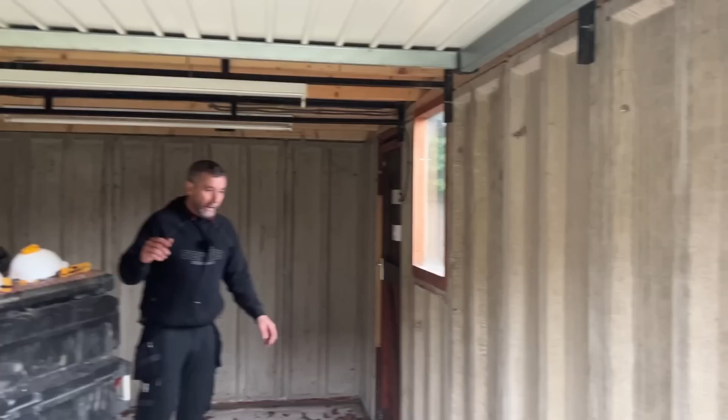So basically, it's a 5x3 garage, concrete sectional garage, and we're going to turn this footprint into a 5x3 garden room. It'll have bifold doors on the front elevation. On this side elevation, there will be a window, and an integrated store with a new door into it.

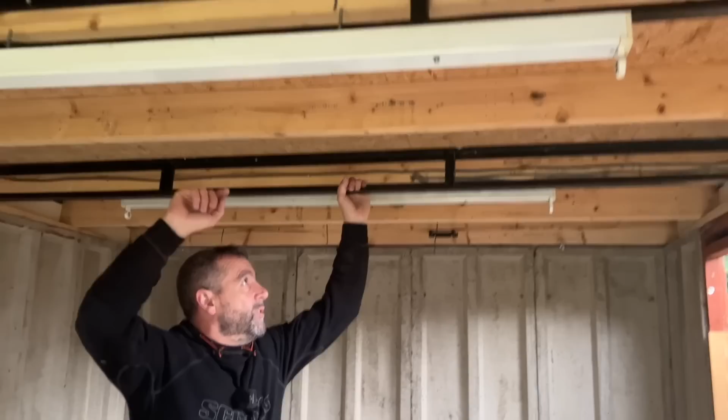So first things first, when we arrive at a job, we've obviously got to strip this, so that's in with the cost of the build. It's had a fiberglass roof put on it at some point, so that's a bit of a new one, we'll strip that. I'm thinking we'll just run the circular saw through it and cut it up into sections. The concrete sectional garage itself is relatively heavy.

The way we will strip that is the way it was built. We'll drop the doors off, take a panel at a time and work our way back towards the back of the building. Then these corner pieces at the back will be held up, we'll take a corner off and work that way, and we'll be just left with one corner. In my mind, that's how they built it.

We've stripped a few of these with me and John. Have you stripped one before with us, Jen? Yeah, you have. They are heavy.

We're a man down as well, so what we may do is lay the panels down, cut them in half, ready for the skip. It's a shame actually, because it's a good, decent garage. It's a shame that it's not being reused somewhere else.

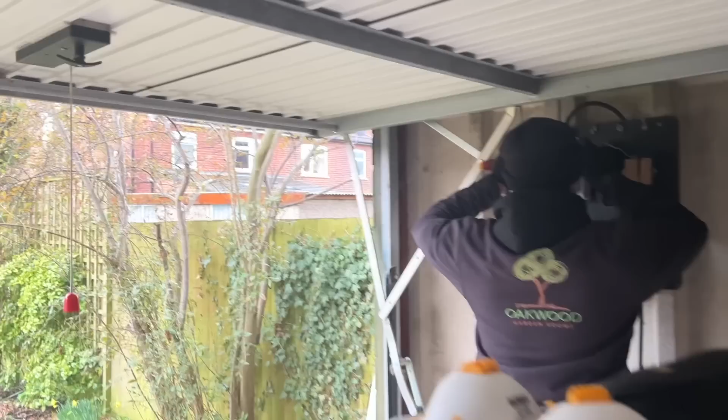But anyway, what John's going to do now, the customer's already turned the electricity off in the house, he's already proved that to be dead. So what he's going to do now is take away the lights out of this circuit, take that board off, and we're going to use that board for our power. He'll put a bag over it, to stop the rain getting in there at night time.

This garage has already got a concrete base. Now, we can't guarantee the strength of the base, so we very rarely build off there. We've built twice off it.

What I'm going to do is try and answer as many questions that have been asked. Jen's wrote loads of questions down over the weekend in a book for me. We'll get the book in a minute and run through some of the base questions.

But the reason why we're not going to use this concrete base is we don't know how thick it is. Our building this size will probably weigh about 4 to 5 tonne, so we don't want to risk building off there and then it cracking in the future.

So what we will do, we'll pin out our lines. This base, did you say it's just over 5 and 3? 5.1 long and 3 wide? Yeah. So what we'll probably do is punch off the corners, dig down, and put our pile system in. But I'm going to talk about it in great detail throughout the build.

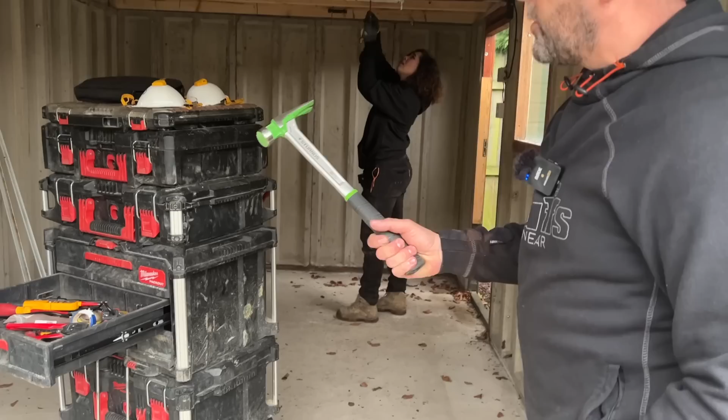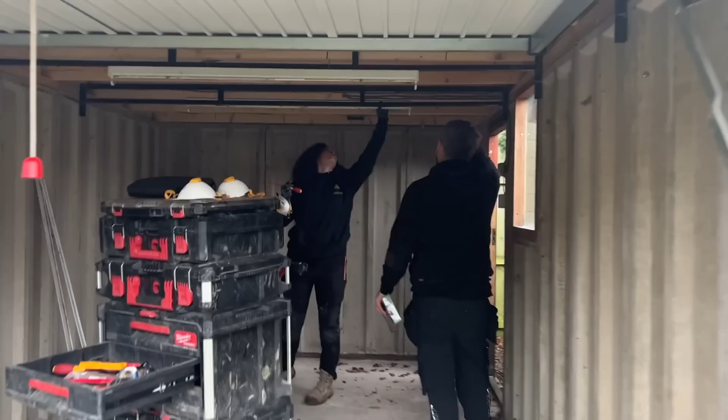So what Jen's doing first, she's going to strip the lights. John's already killed the electricity, obviously, so Jen's going to strip the lights. And then what I'll probably do is get up on the roof and run the circular saw through it, cut it into manageable sections, and then we'll go from there.

But like I said, I'm going to explain absolutely everything about this build. Timber delivery, we've got - I actually forgot to order the timber, so it's going to be here today, but a little later than normal. And we're going to have to organise a skip as well to get rid of this concrete sectional garage.

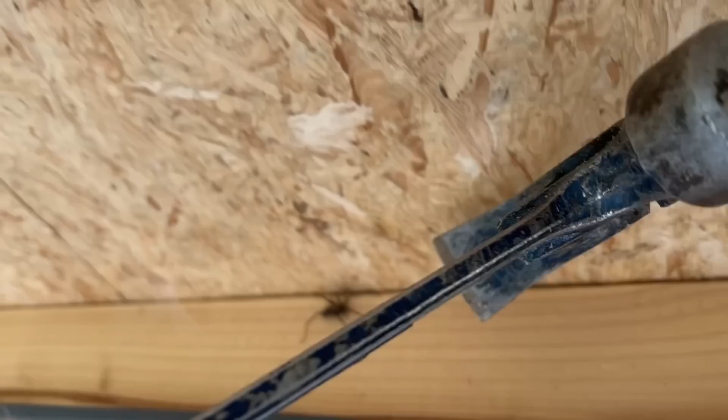Right, the timber's here now. I did actually forget to order the timber on Saturday. Rang them up this Monday morning rather, and it's here 2 hours later, which is brilliant.

3 pack of saws, we'll talk about saws as well. We've got some nails there too - some 90mm smooth, and some 63mm ring shanks. The Viper brand, simply because that's what our supplier uses. We get all our stuff from Shire Timber.

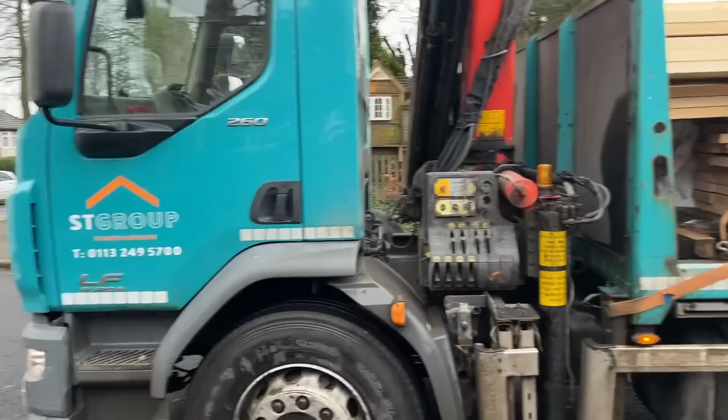This is Arthur. Arthur is a regular driver, and he's an absolutely brilliant bloke as well. Right, if Jen comes round here, she might be able to see what we've got. What's ours, Arthur, that far one? Yeah. So like I say, I only ordered it this morning and here it is already.

I'm going to talk about this extensively, but I'll go through it quickly now. There's your 4x3, that's your 4x2. There's some CLS, some different lengths of CLS, and there's your 5x2 as well, and there's your slate battens for cladding. So you've got base material there for cladding, that's for roof, and that's partly for walls.

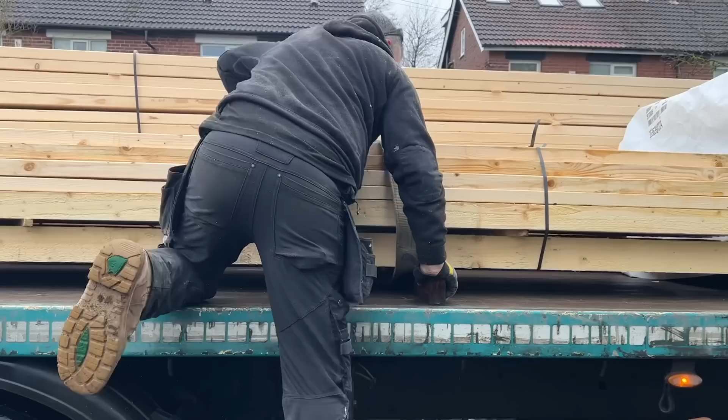The rest of the wall pack will be in under the sheet there as well, with the OSB, the Jaeger Protect, and the flooring as well. So as I say, I am extensively going to talk about this as we go through it. Arthur, are you just going to drop it on the verge there?

Yeah, whenever, yeah. Right, so what he'll do now, I have this off.

There's different ways of building a garden room. You can build it like this, out of timber, from scratch, or there's now metal framing, which is on the market as well. There's insulated panels, and there's also SIPS panels, whichever you choose. But if you follow this tutorial all the way through, you will be able to build one of these without a shadow of a doubt.

And if you buy a build pack, the build pack gives you a full list of materials. So all this will be in the build pack for the size you buy. You don't have to do any working out, anything like that. You just ring up your timber merchants, tell them what you want, get your quote, ring up another one, get your quote from there, ring up another one, get 3 quotes, and obviously go with your best quote. But again, we are going to talk about costings of timbers and stuff like that as well.

So what you'll do, under there is the OSB3. Now that's the roofing board. We want to keep that above all dry. This we're not bothered about - it rains and it's kept outside in the yard anyway.

That was one of the questions as well - does it matter if the timber gets wet? To a certain extent, no. We will sheet ours up to keep it relatively dry, but it will dry out naturally as the build goes on. What you do want to keep dry though is your OSB3 roofing boards.

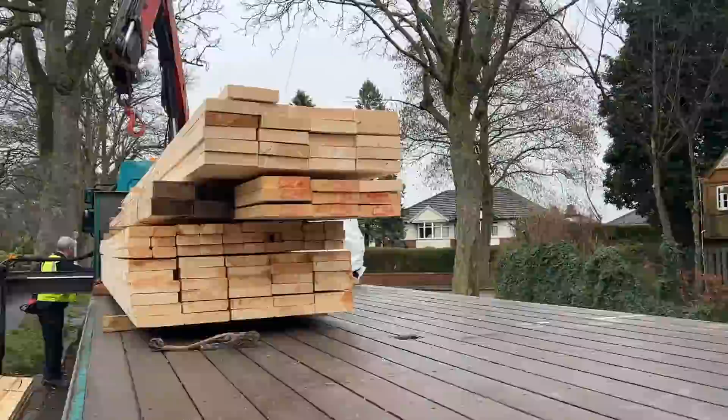Oh, Arthur! Arthur! It's on the grass, isn't it? It's sunk in. Do you want to pull it out with that? As long as you don't slide it to the road. Is yours trapped? No, but mine's back out. Yeah, get yours out.

What's happened is it's trapped the strap on the earth, so he's just going to try and pull that out now. Just watch yourself.

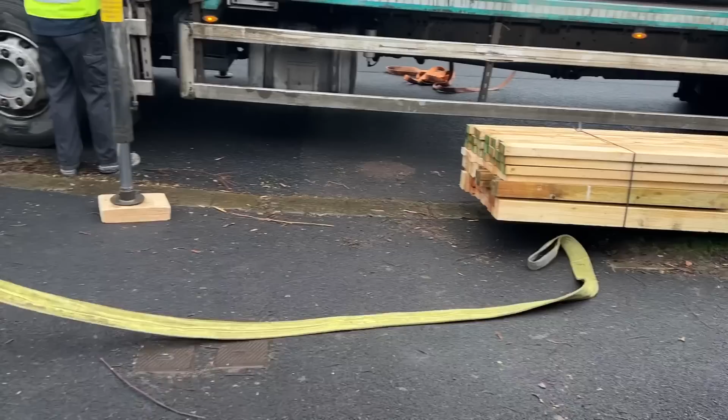Lovely, so successfully got that off without any skills indeed. We left the path nice and clear, and this customer's shared drive, so they can still both get the cars out, only just, but they can still get them out. Right, so that's it, Arthur will go on his way now and get rid of that timber. We will have breakfast, and we will probably get the timber round before we continue with demolishing the garage.

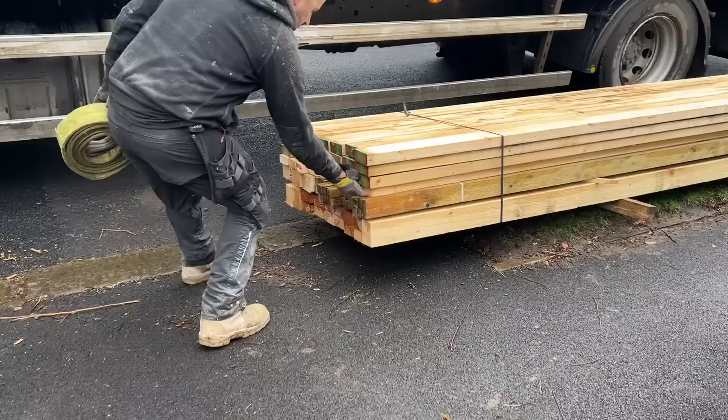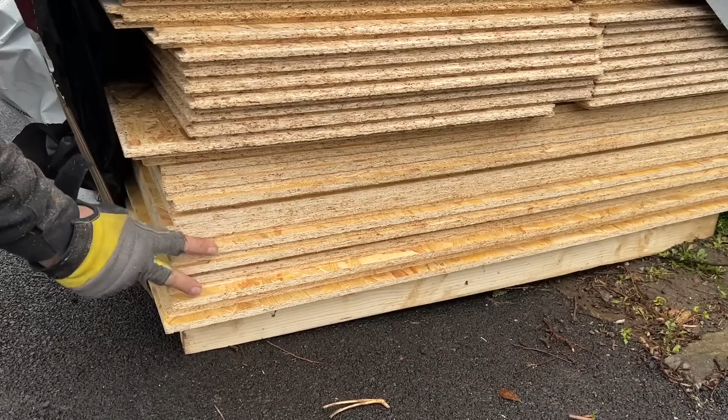I think I'll talk to you about timber then, when we get it round. We will protect ours, though it doesn't matter if it's not protected I suppose, because it's all outside. Slate battens kept outside, 5x2s kept outside on the racks. The thing which generally isn't is the CLS, which is under there. That's our wall framing stuff. We should have, David, can I give you that please? We should have some under here as well. So that's for our walls, that's for our floor, that's for our roof, and that's for cladding the walls and the internal storeroom as well. But like I say, I'll talk extensively about that after breakfast probably.

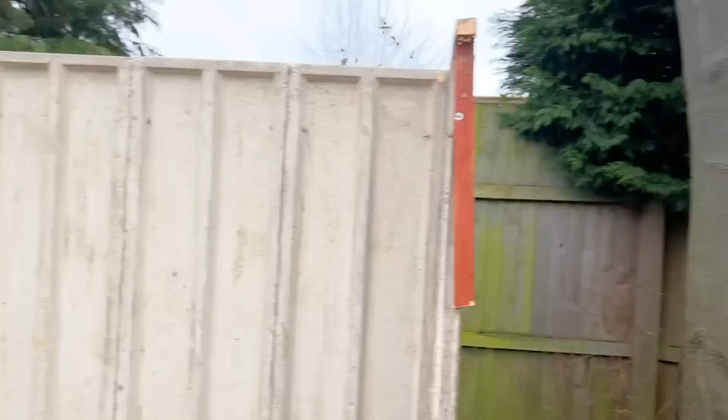Right, so what we're doing, we're stripping this concrete garage. Obviously it's really heavy, we've gone for a reciprocating saw. The reciprocating saw was left in the container, but we've been back, got that, which is a lot better for cutting that fiberglass roof and up into manageable panels. But these concrete things, I'm estimating they weigh about 70 kilos each, maybe even a bit more. So what we've done, because we've got quite a bit of a drive to get to front and skip, we'll cut them in half, with the Stihl saw.

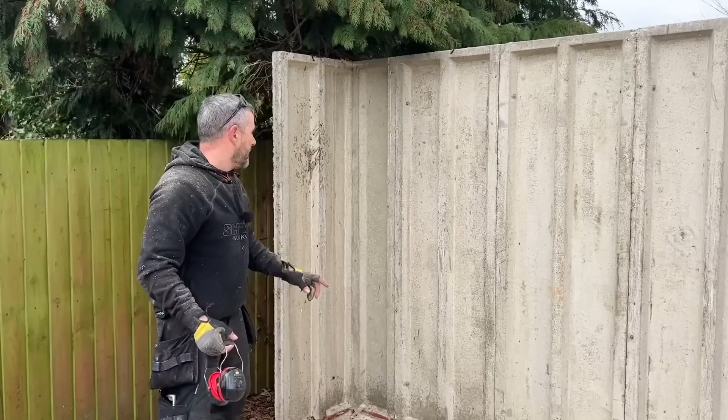But this is how you need to take this down, I'd imagine this is how they built it. They'll get a corner up first and then start from there, but it's by far the safest way, a panel at a time, even though there's a wobble on that, that's still structurally okay. So what we'll do, we'll take off this corner and then work that way and just have the two corner bits there together, which will obviously hold themselves.

But like I say, it's got to be more than 70 kilos anyway, John, what do you reckon? Maybe 100 kilos, not far off that. Maybe 100 kilos a panel, but what we'll do, we'll get them in the skip tomorrow.

But you can see the base now. The base, we're going to talk about it obviously extensively, I'm going to keep saying the word extensively. But what we're thinking now, we might have a chat with the customer, and if he's all right with it, give him a little bit bigger than what he's asked for, just to save us breaking through this concrete pad. So what we might do then is just dig down at the side and put our rods at the side and around, and then in the middle there we'll probably chem fix them if the concrete's sufficiently thick. If it isn't, we'll punch a hole and dig down there for the rods. But we will talk about everything, but that's what we're thinking at this moment in time, aren't we, John?

Yeah, we're thinking make it bigger just to save us more work, even though it will cost more in the long run, but that's why we've got no money in it. Okay, right, so we're going to carry on stripping this.

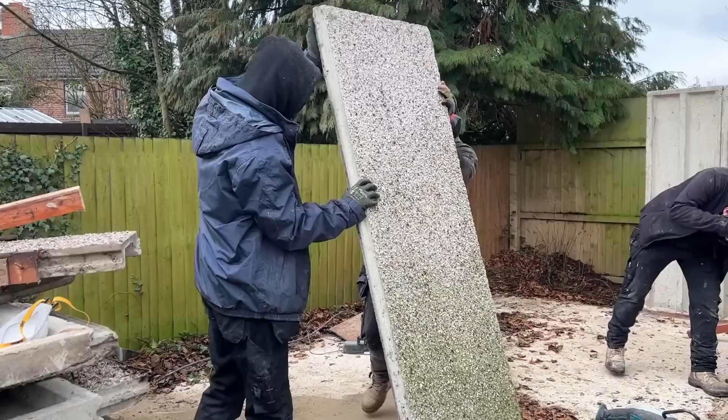Right, the garage is completely dropped now. Skip's coming tomorrow, so we'll get rid of that. Couldn't get a skip because I couldn't remember when I came to price the job whether or not we could have one on the drive. A skip needs a permit, so 24 hours to get a permit to park it on the street, so that's what's happening there. There's the roof, we'll probably cut that up into smaller sections for the skip tomorrow.

And there's the concrete, which we'll bring a sack barrow thing tomorrow to wheel that round because it's still quite heavy. The skip is nearly £300 now, so you need to get as much as you can in that skip.

Anybody who's filled a skip before will know what a greedy board is. We'll possibly make some greedy boards out of these.

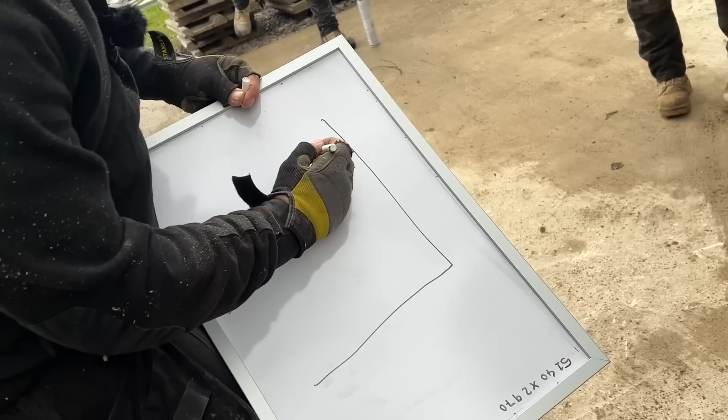So what we're going to do is, if that's the customer's fence there, and that is his concrete pad, so it's 5,140 that way, 2,970 that way.

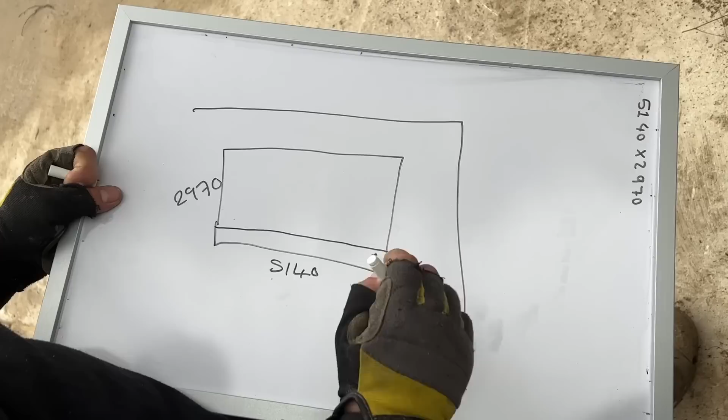So what we're going to do, because we need to save ourselves a bit of work, is cut off that section of concrete there, get rid of that. We're also going to cut off that section of concrete there, get rid of that.

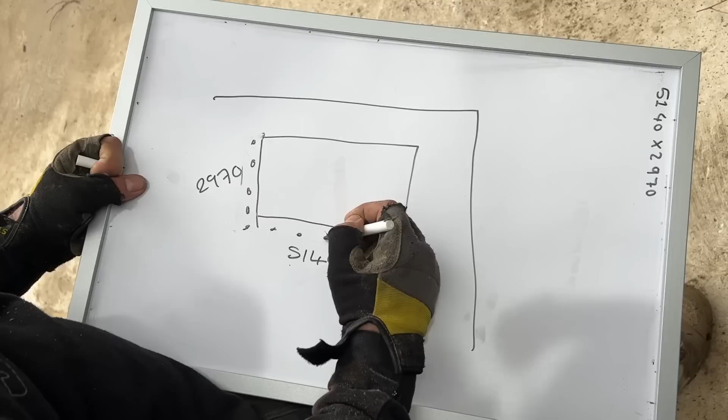Then we will put our rod system like that, which means the customer will not lose any of his garden to what he had originally, and the rod system will go down the side of the concrete pad, like that, and in the middle we're going to drill some trial holes.

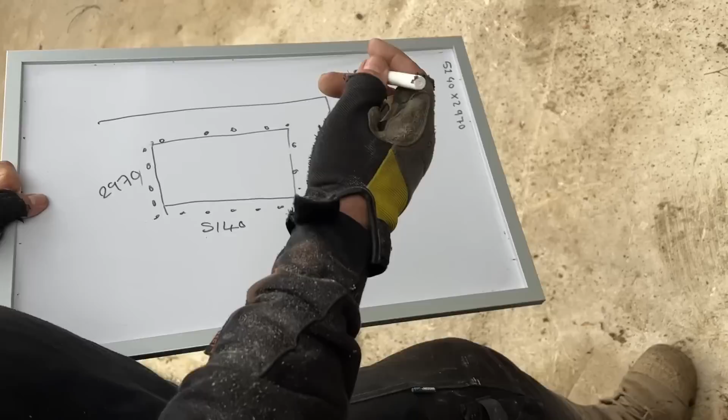What we'll do basically is get a masonry bit on the hammer drill and drill it through the concrete. When we feel it goes through, we'll measure how far the drill bit's gone in, and if it's 4 inches, we'll drill some 25mm holes there, and resin them with chem fix.

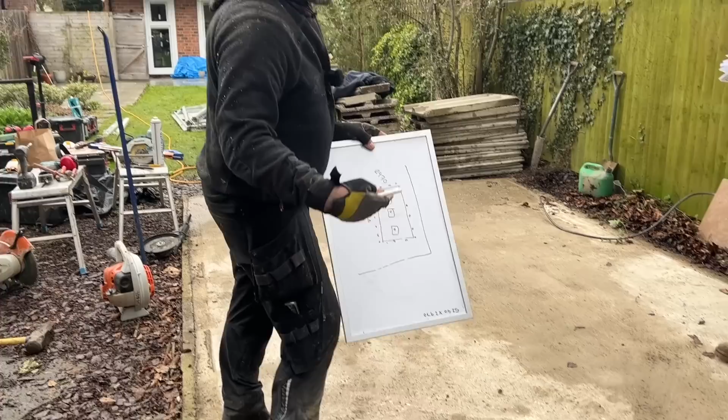It's like a chemical resin, but I'll show you that if we go down that road, and we'll put some rods in there with the chem res. But if not, we will cut square holes out if it's only like 2 inches thick, punch some holes and put some supports in. And don't forget, the middle there is basically to take the bounce out of the floor.

What we're going to do now, I've asked for questions because I want to give you as much information as possible, and without the questions I can't give you the answers. So Jen spent all weekend, haven't you, Jen? Literally all weekend writing down questions. So she's going to fire a few questions across, and I'm going to try and answer them the best I can.

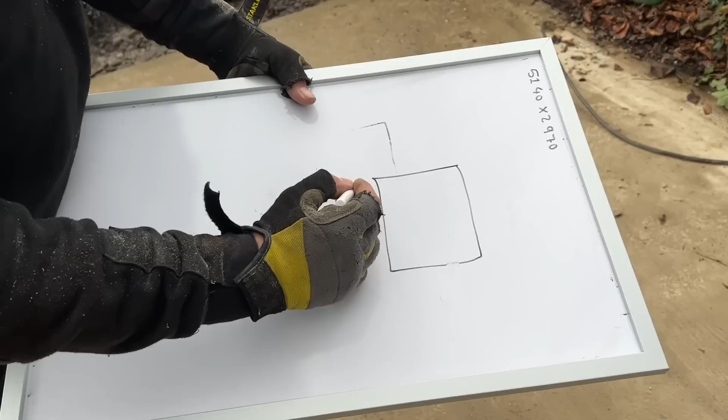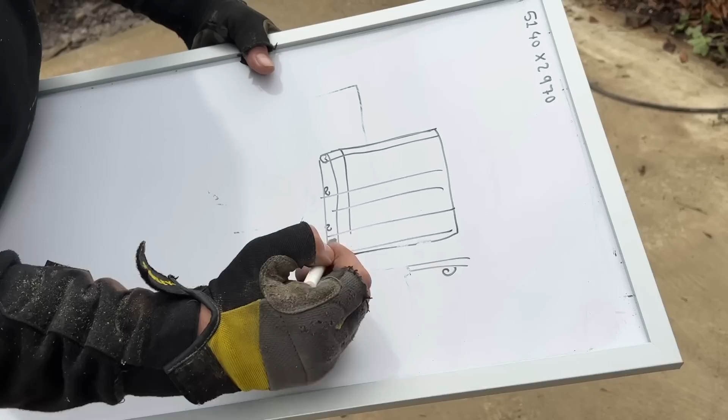So what we did, we put a series of rods like that and extended the garden room. Here the timber was sat onto the concrete, but we had our normal frame around there, so that was on the concrete. We put a DPC under that and infilled with insulation, and then we extended it and made it bigger. So that's what we did.

But the customer told us the concrete was 8 inches. We trialled it, it was 8 inches, and it had rebarring as well, so we were more than happy to build off that. And we did another one in Huddersfield - I believe the lady's on the group as well - and we chem res'd that, so we drilled it.

It was like 8-9 inches thick somewhere, wasn't it, John? And we drilled it, put chemical resin in, and put the rods in there. So yeah, we've done that, but we've adapted it as well.

Next one, there's a question from George Webstale. He's building on a concrete base and he's wondering how he will insulate the floor without causing a height issue.

You can't really avoid it. This is one of the reasons we use the rod system. Let's say this pad wasn't here and you wanted to build on a concrete pad - you'd have to dig out this area first, dump the muck elsewhere in your garden or into a skip. You'd be digging down 8 inches, which is a lot of muck. Then you'd want 4 inches of hardcore, whacking it all down, then create a shutter to get your level pad, put visqueen in to stop damp coming up through the concrete, and then pour the concrete - and all that's time and money.

Where am I going with that one? What was the question? I can't remember. Hold on... he's building on a concrete base, he's wondering how he will insulate the floor without causing a height issue.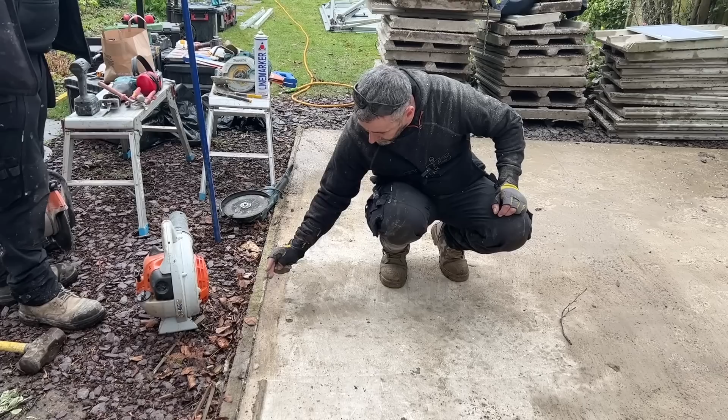So basically what will happen is you'll put this pad in like that - can you see this ground's pretty level? You'll put the pad in, but then you have to insulate the top of the floor. You'd build your walls off there, put insulation up the side of the walls as well, then put 100mm insulation here, or 70 at a push, and board over the top of that. So you've lost nearly 4 inches in height - even with a level base, you're still losing that height. You have to insulate the concrete, otherwise your building won't be thermally efficient and it'll be freezing.

I've got another question here, from Zig, pretty similar. He's getting a concrete base added to the garden in a couple of weeks. He's seen that we cut holes in the base and re-concrete the rods in - should he do the same, or should he screw directly into the concrete to hold the floor frame? As long as he's got a sufficiently strong pad, 4 inches plus, with concrete and rebarring, that would be sufficient for any building.

What he needs to do then is put a damp course in and fix his timber wall plates straight to the concrete, but he'll need a damp course under there as well as on the concrete itself. As per the last question, he will have to insulate the inside of that as well.

Another question: is it best to leave insulation off the concrete using slate battens, and what's the lifetime of insulation since the bottom's exposed? If he's putting the insulation straight onto the concrete, that's fine, as long as there's a damp course under the concrete. He can put the insulation straight onto the concrete as long as it's level - he doesn't have to take it off, and that insulation will last a lot of years.

It's not remotely going to rot. The only thing that breaks down insulation is UV rays, and since it's trapped under the concrete and under the floor, it's never going to come into contact with UV rays. I'm going to answer one more while you're doing that.

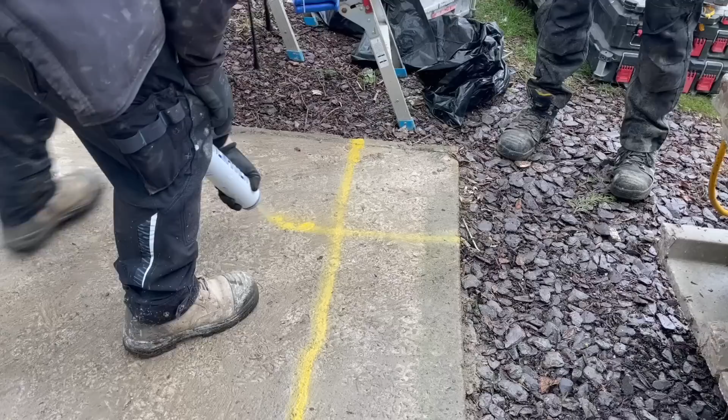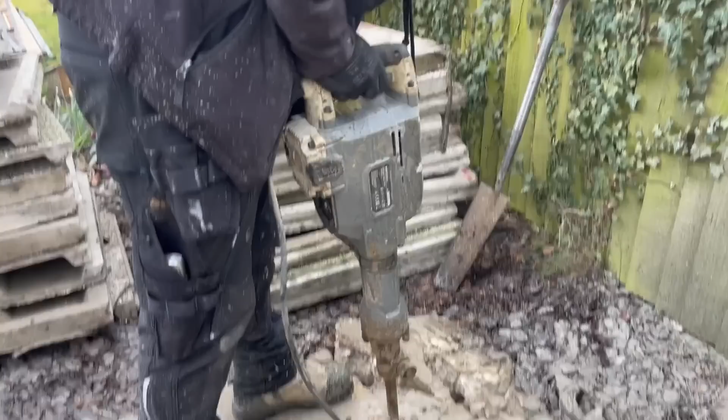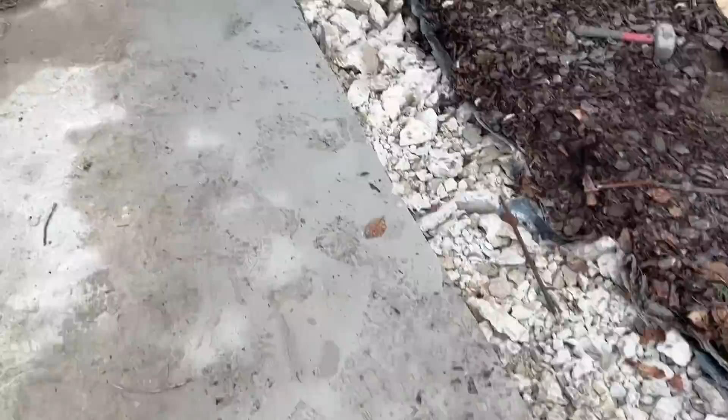Right, you can see what we've done then. John exposed concrete over here, and he showed me it was 4 inches thick. Turns out it was a lot thicker - in some places, let's have a look at this, we've got 6 inches thick. We still wouldn't have used it, to be fair. There's no rebar in it, so I'd be worried about cracking in the future and maybe a wall subsiding slightly. So what we've done, we've took the front off, we've took the side off, so that we can push it all that way and that way, which is what we'll do.

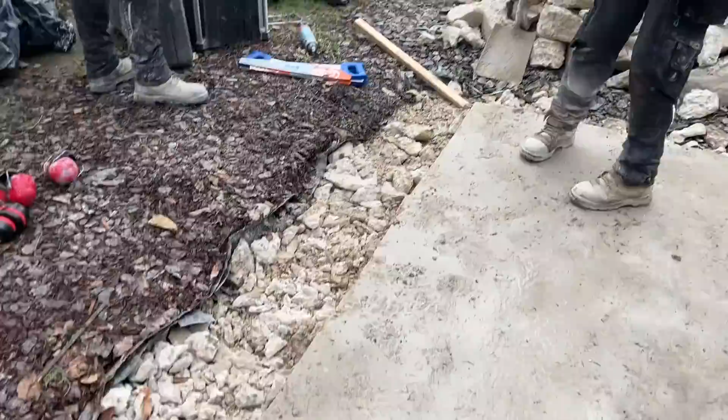So tomorrow we're going to dig some holes down there, and we're going to talk about the holes and the rods tomorrow. We'll put a row down there and a row down there, a row at the back end, and we're definitely going to chemically fix the rods. So what we'll do, we'll drill 25mm holes, put the rod in with chem fix, and that will get a grip of that, and that works really well.

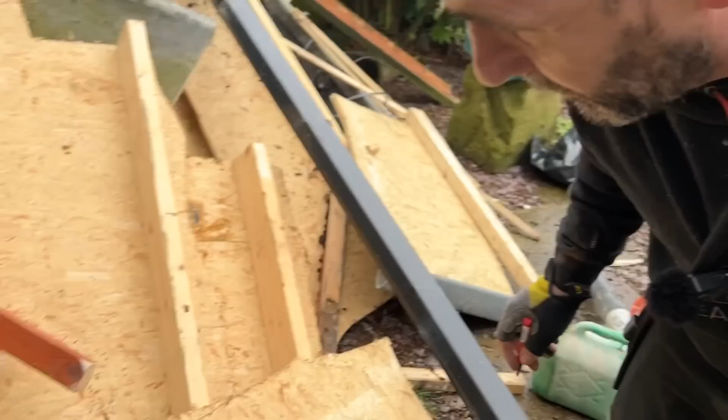Next one, Michael Bonehill: his back garden drops by about 2.5 feet from the back wall of the house down to the fence. At the bottom of the garden, where does he take his measurements from to allow him to build up? It's open to interpretation, but this is the rule: if that's the lay of your land, to exaggerate it, and that is your building there, the 2.5 is taken from the highest point of land adjacent to the building. So that distance needs to be 2.5. Adjacent means closest to the building, so that point of land would be closest. Even if that was 4 metres, your neighbours ain't going to be happy, but that's where your 2.5 is taken from, the highest point of land adjacent to the building. Even if that's the front of your building and that's the slope on your roof, imagine a line going across at 2.5, that's your highest point of building adjacent to the highest point of your land, if that makes sense.

RC Escape asks: when putting in the rods, how do they not sink, and do you worry when it's built on a slope? We'll talk about that tomorrow, but basically there's a steel plate washer that sits within the concrete so the rod cannot punch through. We dig down to solid ground and the concrete sits in the solid ground, so it's pushing down on solid ground, and the rod can't push through because it's got a square plate washer.

I feel a bit like Martin Lewis. Next question, well done, I think I've done...

Is that it for the base? I think that is it for the base, that's it for the base. Right, we're going to go talk about timber now.

Oh, there's one you wanted John to answer. Go on John: Pazza99 asks, be good to have more detail on the different challenges faced when digging out the holes for footings, like tree roots, discarded old bricks, and what's your opinion on ground screws?

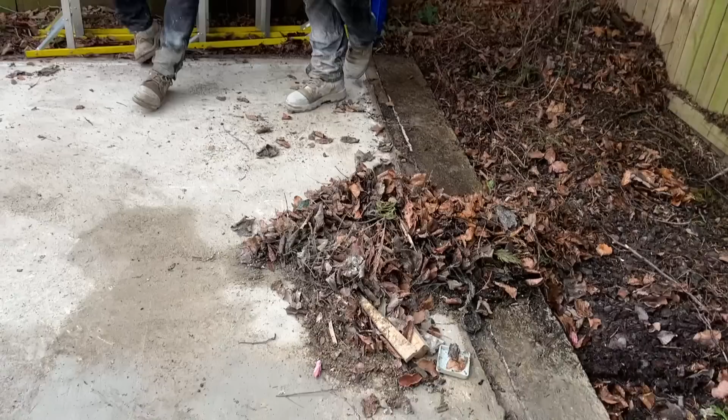Why do you always use rods, even on existing solid concrete bases? Well, I think we've answered that - we cannot guarantee the strength of this base, although it is 6-8 inches thick. I've commercially built these and I have to give a warranty on them, so we have to guarantee it. Because we didn't put it in, we won't build off it, unless the customer tells us that we can, and they'll take the fall for it, and we're happy it's 8 inches plus.

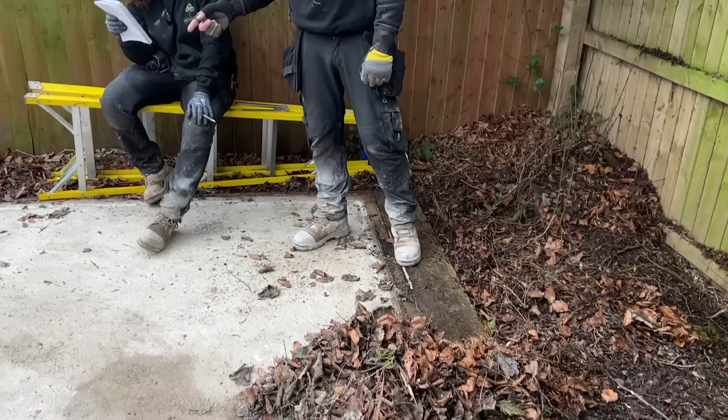You're not saying it didn't suffice? No, I'm definitely saying it didn't suffice. If this was my garden, I would have drilled some holes in this and gone, you know what, I'll build off this. The only downside is it's been laid properly - there's a DPC under it, but it slopes, so you'd have to counteract that when you built your walls because you've got a sloping floor.

Can you explain how different methods - rods, screws, concrete blocks - can be used in various types of location? Yeah, I think I've just explained that. So there is an option.

Let's say your ground's like that - you could have rods there if you wanted, a breeze block wall, or breeze block piers. You could dig a little hole and breeze block some piers up, but you'd have to make sure they're all dead laser level, then just support your framework on that. Would it make a difference about the type of ground - sandy, rocky?

I know a lot of people worry about clay, but we prefer to get clay, don't we John? Yeah, it ain't going nowhere. If you're digging an extension, they want you down a metre till you hit good clay. The clay's solid - once that concrete's in there, it ain't pushing down anywhere. It's absolutely brilliant, clay's good.

We've had sandy ground, haven't we? Yeah, we've had rocky ground where it's been just backfill - loads of stones, loads of crap, loads of house bricks - and we've dug down to a good decent depth. Then what we've done, we've gone wide as well, so we've got almost an elephant foot shape of concrete, belled out at the bottom. That gives us a big solid base. Even though the ground is pretty crap, you've got a big section of concrete weighing it down. That's what we've done on rough ground, and when it all ties in together - you might have one that's a bit dodgy, bit crap ground, but you'll have a couple that are really good, and you've got loads of concrete in them. Bigger holes, wider holes, that's the answer to that one.

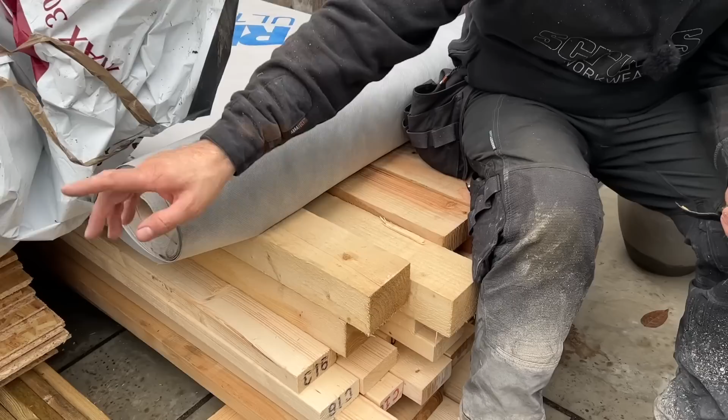Let's say you bought a build pack for a 4x2 free. Granted, there's a little bit more in this because we've got an internal wall, but this is what you're going to get - a full list of all these materials here. Yeah, that will be on the list. And if you build the build pack according to the instructions and stick to the size that you've gone to, then you will have very little wastage. So the build pack itself will save you money and time.

A lot of people have asked the question, where do we get this 4x2? We're going to talk about every type of timber as we go through it. But the 4x2, apparently it's a struggle to get hold of in Scotland.

So I asked a question on the group. If you're not on Facebook and you can't stand it, which a lot of older people do not like, maybe you want to join the group anyway - 30,000 people, and you get good advice. I asked a question the other night and got loads of answers. So in Scotland: Thornbridge Timberworld, Rider Services at a place called Moffat, Hughes Gray Build Base at Bankery, BSP Timber at Aberdeen, and Direct Line Timber in Dundee. They all sell the 4x2.

Like I say, we're going to talk about it as we use it throughout the build, but the C16 as well, the construction timber. We can talk about C16 and C24. C16 is cheaper than C24, and there is very, very little difference. C16 is more than absolutely fine. 5x2 for the roof, and then here the Aga Protect, the 11mm OSB, the OSB3 roofing boards, and the slate battens as well.

And pricing - now pricing's a difficult one because throughout the country prices vary. I mean in London you'd be paying nearly double for this timber we've got sat here. But pricing, I'm not going to really talk about much, just apart from the fact where you want to be buying your timber from.

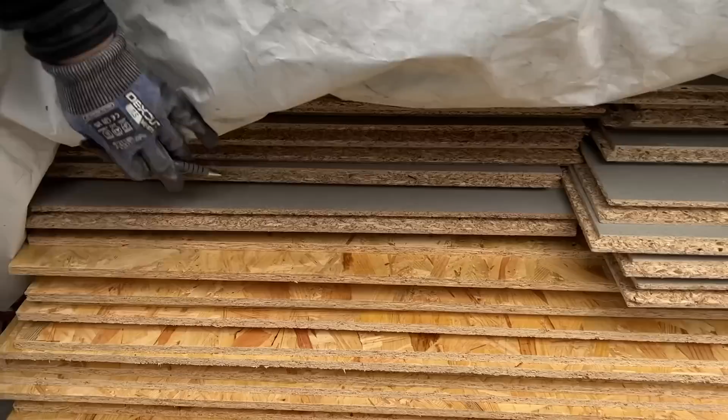11mm OSB, Jen just points to that there - it's 2.4 by 1.2, so it's an 8x4 sheet, yeah, it's 11mm. Right, the most expensive place I found was Homebase, it's £35 a sheet. Whereas if you go to B&Q, I think it was £25, and Wickes was £24. Our timber merchant, we get it at £21.50.

So what I'm saying to you is, if you do buy a build pack, print it off, give it to your timber merchants and get them to argue with each other over which can get you the cheapest one, because you'll get it a lot cheaper than if you go to one of these like Homebase or B&Q. And get your timber from there. So that's what you want to do. You want to shop around, you want to go to a local builders merchants because you'll get a much better deal and you'll get better quality timber as well.

Again, with fixings and consumables like blades and things like that, it's like Wickes and Toolstation - they're the same company. B&Q and Screwfix, again, they're the same company. We tend to use Toolstation all the time because when I googled it, it works out 10% cheaper than Screwfix, so why wouldn't you go there? Again, I'm in no collaboration with anybody, so Toolstation's best. Local timber merchants are best as well, and you'll get better quality timber too.

And I think that might be it for today now. What we're going to do - skip's coming tomorrow. We've had to get a permit for that, so that'll be on the road tomorrow. We'll get all the concrete in, we'll get the metal on top of this concrete, and no doubt somebody will pull up in a van and take the metal away, which generally happens. And then we're going to start digging the holes.

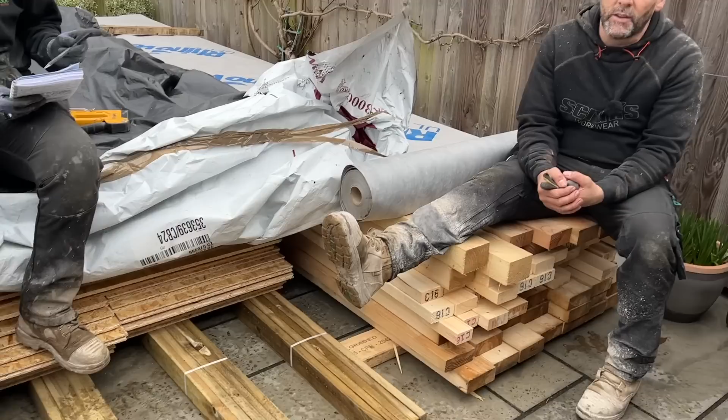He wanted to know if it's more expensive, and will it meet any combustible requirements? Yeah, it does meet some requirements, but it's certainly less combustible than timber anyway, and cost-wise I think it will be within the region of timber, but you'll have the benefit of not having all this timber turn up. You'll have a kit and build it in a day, whereas we certainly won't build this in a day, that's for sure.

It's called Jason Busby. Jason who, sorry? Busby. Jason Busby. But the kit will be available soon enough anyway, that's the goal, to get that up and running.

And shoes, yeah, boots. We'll talk about uniform as well, and we're going to talk about pack-outs too, because pack-outs are expensive, but they're brilliant. We're going to talk about them possibly tomorrow.